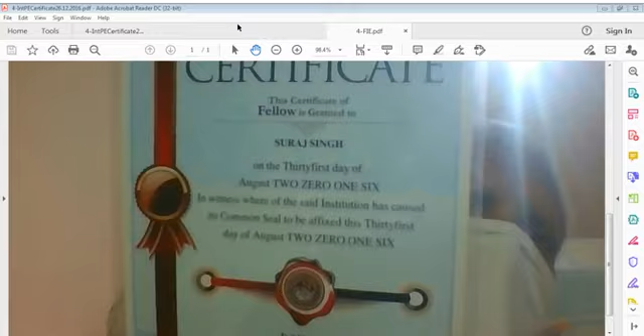I take it my responsibility to disseminate. It's up to them, however, to what level each and everyone considers, or they take it only as a talk, or they consider it as something supportive. It's up to them.

Yet I continue my efforts so that my earnings, not money earnings, but experience earning, should not go waste. I have certain medium, that is Facebook or others, to utilize them properly for everybody's benefit.

Every person who is competent, who is professionally certified, qualified, or considered competent, considered reliable, has a duty to do this. I'm not doing any obligation on anybody, but because it is required, therefore I try to say in an easiest way so that people may benefit, may not benefit, once it is in history.

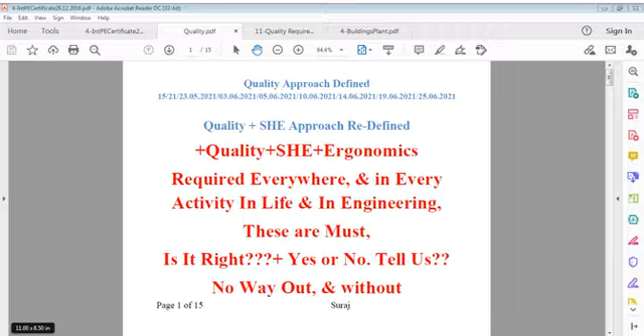In an adverse situation only, in a struggling situation only, is examination conducted. And we know what your strength is. A smooth life everybody can live, what's the problem, everybody can live a smooth life, I enjoy. That's nothing to say it's achievement. Achievement comes from struggle. Those who accept adversities and struggles, they are better than those who don't.

Quality again is a very, very significant word. Quality, in reality, is nothing very specific, nothing extraordinary. This is inbuilt with every material, inbuilt with every agency, inbuilt with every human being. But the only requirement is its discovery within yourself. You have to identify where it lives, what it says.

Every article, every good that I produce for you from nature has a complete balance of quality, a complete balance of safety. For me, your existence or non-existence does not matter. Today you are there, tomorrow you may not be there. I don't mind it. For me, there is nothing specific in this, because you are a product for me, nothing else.

And you forget for me, that is something else. That is your weakness, not my weakness. I gave you body, I gave you mind, I gave you everything you needed. What did you give me? Tension, unnecessary tension. You can go to history, you can go through the yugas. What did I get? I did mathematical generation, knowledge generation, scientific generation, I created medical generation. There is nothing that I did not do for your survival. But you do not value this.

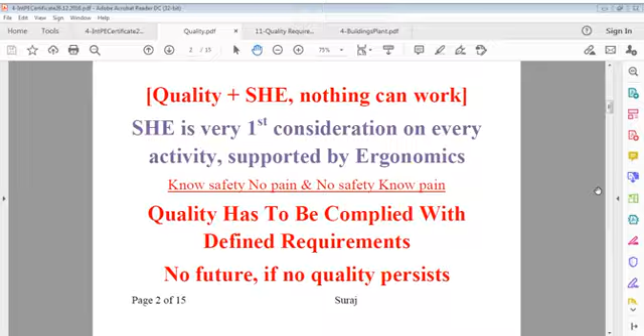So my defined requirements are different. I am... on for engineers, I can't say on behalf. Engineers must realize quality facts. If you cannot realize, nobody can realize in this world, quality facts. In particular, in the civil engineering branch, there is no way you can come out without quality. You have to change, must change aspects of society, or else quality can never exist.

And non-quality means I shall also be non-quality. Remember, action and reaction are always equal and opposite.

If you don't care for yourself, forget that. I shall take care of earth because I don't want to spoil it just because of your nonsense, or because of your carelessness. I can't accept what you think always. Sometimes I ignore it, thinking oh, these are my people, my kids. But until when? There's a limit.

I become your mother and father all the time. Sometimes father acts powerful and sometimes mother acts powerful in me. You abuse me when I'm in motherhood, and you run away when I am in fatherhood. But I need both, I require both.

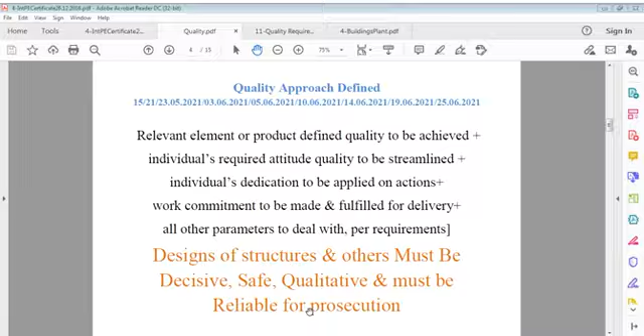Requirements are always different. Every act has different requirements, and that is what quality means. When we say this is required, what does it mean? We generally speak this word in our engineering world or other world. He always says, what is your requirement, or what do you expect this item, this material, this good to give you? And if you think yes, this is worth it, I need this, and if this material can give you this, why not buy this material? That is only an analysis you conduct with an assumption that this material shall deliver what you intend to get.

That is the formula, that is the thought behind it. But when you find that this assumption goes wrong, that time I should not have assumed, because in finding that, you don't find that. That is where you can say the problem lies. So I used to talk about this quality requirements. I've been talking for many days, and I shall keep talking, and also continue.

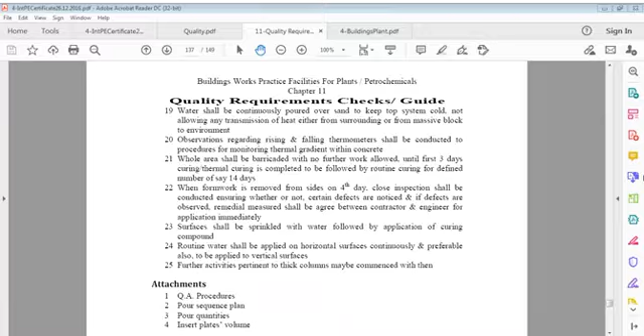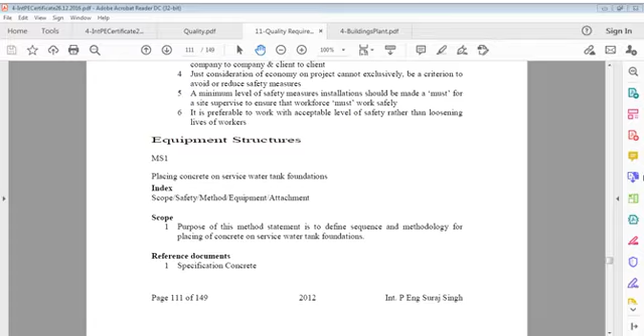I talked about the compressor foundation the other day. That was cracked gas compressor. I talked about it last time. I think I've gone far behind, so I'll go back. I talked to you about equipment structures, placing concrete on the service water tank foundation. After that was the compressor structure, RCC column plate. I did it, I explained that to you.

Then yesterday, I think, yes it was yesterday, 27th June. This was cracked gas compressor, in which I reflected about this very small scope, which is also valid for other compressors. The purpose of this statement or method statement is to define the sequence of engineering activities for concrete pouring that shall be implemented and prosecuted for permanent inclusions within the RCC massive foundation block, in addition to reinforcing bars, cathodic protection inserts, columns, starter bars, and starter reinforcing bars to support compressor tabletop structures. A compressor is a heavy vibratory machine, you can say.

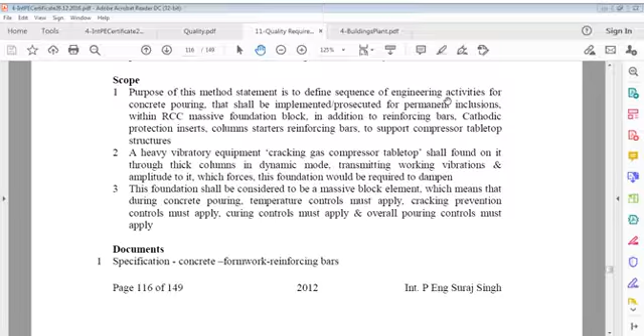...of doing concrete in this statement, where we worked about 8 masons, 2 carpenters, on this massive foundation. It's smaller than the crack gas compressor, but still a compressor.

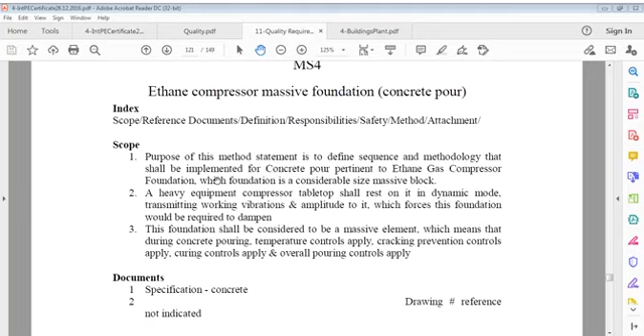The index is the same: scope, reference documents, definition, responsibility, safety, method, attachment, etc. The purpose is also almost the same. I can read it again. The purpose of this statement is to define the sequence and methodology. Well, this is the old one. The previous one also, I did not change it because I did not put it in writing, but it's the same.

The difference is only in this other one, you can see - I see the other one as well. Again, the same applies here. If it's the other one, it's the same thing, word by word. No change in that, and it is here, you can see.

Again, you can read that if you wish. Only change is, in place of cracking gas compressor, it will be ethane gas compressor, or it will be propane gas compressor. Purpose of this method statement is to define sequences of engineering activities for concrete pouring.

This shall be implemented for permanent inclusions within RCC massive foundation block, in addition to reinforcing bars, cathodic protection inserts, columns, starters, and reinforcing bars to support compressor table top structure.

A heavy vibratory equipment, cracking gas compressor, or ethane gas compressor tabletop, shall found on it through thick columns in dynamic mode, transmitting working vibrations and amplitude to it, which forces this foundation to be required to dampen.

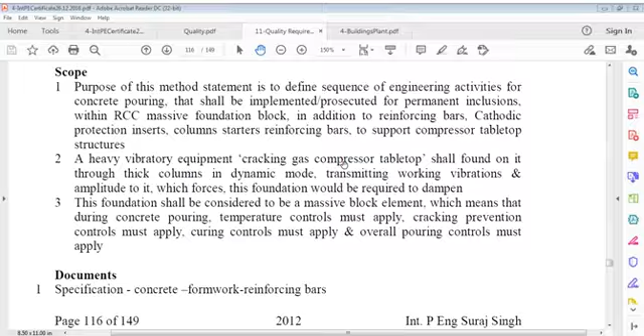Documents or specifications related to concrete, formwork, reinforcing bars, and then there are designations. You can see these responsibilities also.

There are certain designations like project director, project site manager, having different responsibilities like control over all operations in all respects, including cost and budget, pertinent site organization, management and control. Construction site manager is also defined that way, shall work through project director or project site manager, and procurement arrange resources required accordingly, acting overall responsible for prosecution and implementation of ongoing operations or activities whatsoever.

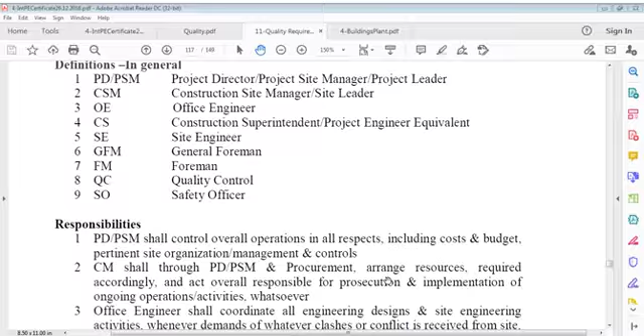Then office engineer is there, who shall coordinate all engineering designs and site engineering activities whenever demands or clashes or conflicts are received from site, so as to solve all issues technically, and no work should stop at site.

Then it was CS, which is construction superintendent, who shall coordinate, control, monitor, and direct site engineer, general foreman, and workforce for operations in relation to distribution of resources and all engineering related issues.

Site engineer shall be responsible for running and implementation of all site operations and follow instructions given by superintendent, construction manager, etc., and engineer's representative, of course.

General foreman shall actually lead all execution operations by directing all foremen and workforce as necessary from time to time, depending on requirement on site, and to utilize on an optimum basis use of whatever available resources.

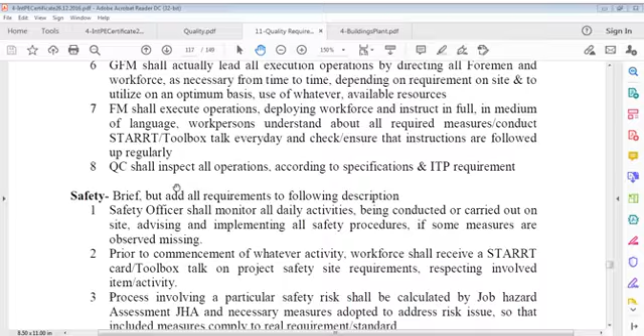Then if you come to safety, it's so brief, but it's very important. You can add all requirements to these, not necessary. You can find yourself, if you consider some more requirement is there, you can put it in this list, no problem. It's your job, you have to do.

Safety officer shall monitor all daily activities being conducted or carried out on site, advising and implementing all safety procedures if some measures are observed missing.

Prior to commencement of whatever activity, workforce shall receive a STARRT card toolbox talk on project safety, site requirements, respecting the involved item or activity, since safety is very important.

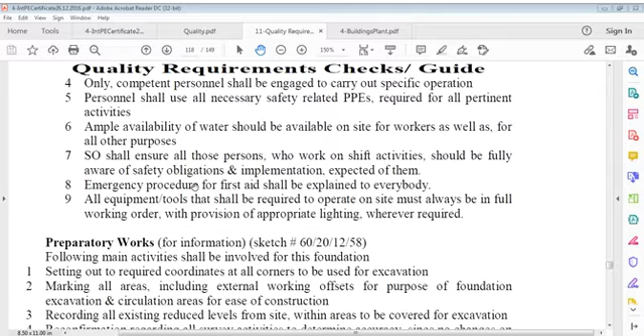Safety officers shall ensure all persons who work on shift activities are fully aware of safety obligations and implementation expected of them. Emergency procedures for first aid shall be explained to everyone.

All equipment and tools required to operate on site must always be in full working order, with provisions of ample or appropriate lighting very much required. So we talked of all this, then we talked of preparatory works in which we contemplated what to do.

We said that setting out the required coordinates at all corners to be used for excavation, marking all areas including external working offset for purpose of foundation excavation and circulation areas for ease of construction.

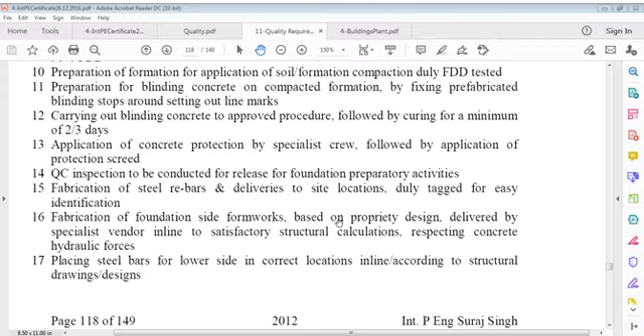So we can say recording, so many requirements here, preparatory works which are same for every other one. I'm just trying to review this because it's very important material. I just wanted to read it for you, and that's also very important because everybody has to understand this. And I can do it, no problem, I'll do it, just takes a few minutes. Meanwhile you can read this very important topic, important every time, all time, and we have to understand that importance as well.

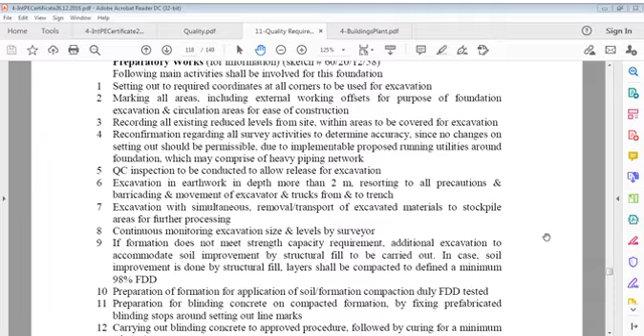Sorry, little late again, what to do? Some problem exists, what can I do? So what I say, as I usually say, that activities are same. Just to remind everybody for clarification.

Setting out is very important. There are coordinates on which we have to site our structure, site our building. It's a building, of course, a foundation to be enclosed in some shed or steel building. Actually it is a steel building in which this foundation shall be kept. I'm talking of foundations, but not of the shed or steel building. We shall have sheeting completely in vertical walls and sheet roof.

It shall be an inbuilt structure with many other connections and interlinks with this foundation, a complete process. We're talking only of the foundation, but this foundation will carry your machine, and there's a complete process of gas, because this is a cracking gas compressor which will be connected to the whole circuit, whole mechanical installations, and that shall work in that steel building. We are only talking of part of that; we can see that building process separately as the gas process.

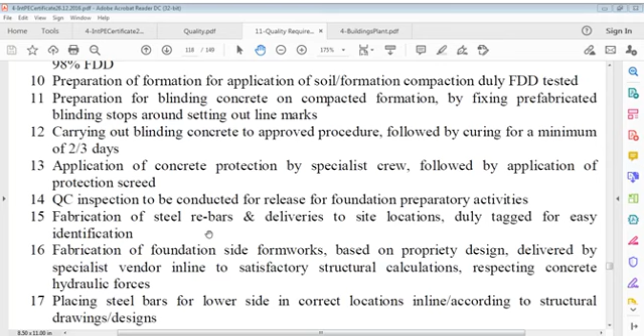Now, fabrication of steel rebars - fabrication of steel reinforcing bars and deliveries to site locations, duly tagged for easy identification. These may be fabricated off site or on site. That depends on your specific contract and what is required; the space can do it on site itself, it doesn't matter. So, fabrication of steel rebars and deliveries to the actual site location, duly tagged for ease of identification.

Fabrication of foundation side formwork. Foundation side formworks based on proprietary design, delivered by specialist vendor, because depth of foundation is around 2 meters or more. There should be design considerations, fluid mechanics considerations - all considerations must meet specific design requirements. When it's 2 meters of concrete, the stresses or forces of that concrete into the system, particularly at about 0.75 meters from below, where the resultant horizontal force of concrete would act, in addition to moments - that's what I mean by proprietary design. It's not necessary that whatever you think is the design - it could be a different one.

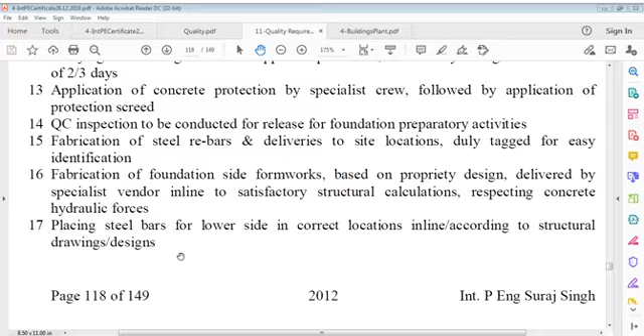So, fabrication of foundation side formwork based on proprietary design, delivered by specialist vendor in line with satisfactory structural calculations respecting concrete hydraulic forces, placing steel bars for the lower side in correct location according to structural drawings and designs. Then you have to place chairs.

We generally call those well-designed bars - first horizontal, then vertical, then horizontal, then vertical, and in the opposite direction. It's like an inverted U, not vertical but inverted U, with opposite legs at the bottom. There's an inverted U, with two legs in horizontal position, one on this side and one on the other. We generally call it a chair, and it is used for bars at the higher level, not bottom bars but top bars, to bear the top bars' positions while placing them, because they cannot stand otherwise. It's a kind of stand for those bars.

In this type of structure, which is very heavy, you may use up to 25mm bars, or more than that 32mm bars, depending on what's easy. Generally I think 25mm bars are used for the purpose of chairs - placing big chairs, not small chairs, because these are big foundations, and all upper bars shall be carried by chairs, while bottom bars are carried by concrete spacers. So, placing chairs suitable to requirements, fabricated out of heavy steel bars to support upper layers of rebars.

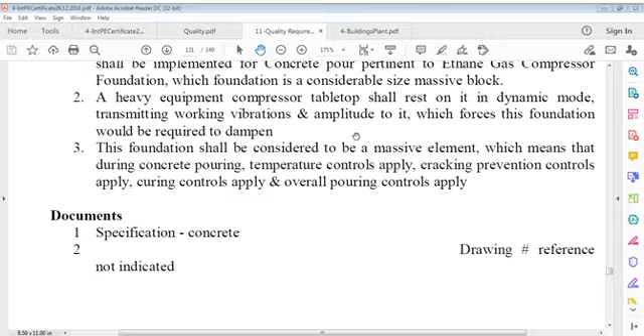Once concrete pour approval is obtained, there's another procedure which I'm going to define now for a different compressor. Yesterday we defined this for the ethane compressor, which I already explained. Now I'm going to do this here.

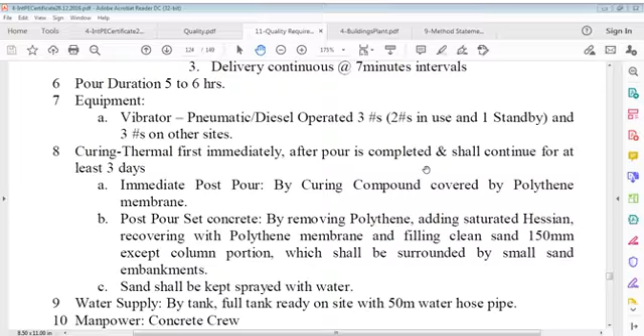Thermal curing happens immediately, and after pouring is complete there is the other routine curing, which is similar. You have to immediately cover with polythene if you use curing compound. Then after many hours, you can remove the polythene and spray on saturated hessian. Then cover with polythene again, and of course cover with polystyrene. When the polystyrene board is covered with 150mm thickness of sand, you have to keep it wet.

Then you have to keep it wet all the time until your 3 days are not over for thermal curing or heat curing. You have to keep water also, a full tank there for this purpose, and a 50-meter water hose pipe, so that you can keep this portion cold.

Water shall not touch concrete, but it will keep your sand from drying away by wind, because it's saturated. So your top, concrete top, your sides, and below concrete, all are sealed, watertight, airtight, and curing goes on, meaning all heat generated from inside shall not evaporate to require more water. Heat generated shall remain within concrete and help in curing faster. It's not water curing, it is thermal curing.

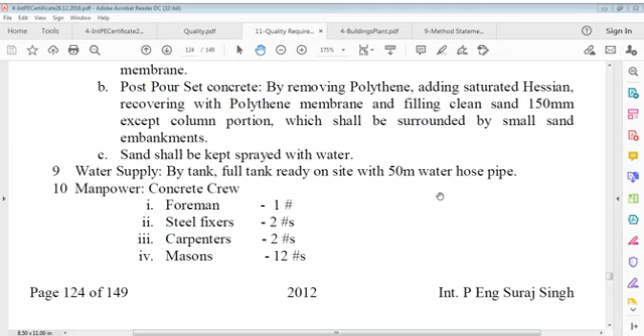And of course you have manpower, you can see this manpower is there. Then you can say what we used. As I said, we used GGBS as replacement of cement, 70% GGBS we used in this case, same BS 4246, ground granulated blast furnace slag cement. Concrete temperature is 24 degrees Celsius and slump is 150 to 175.

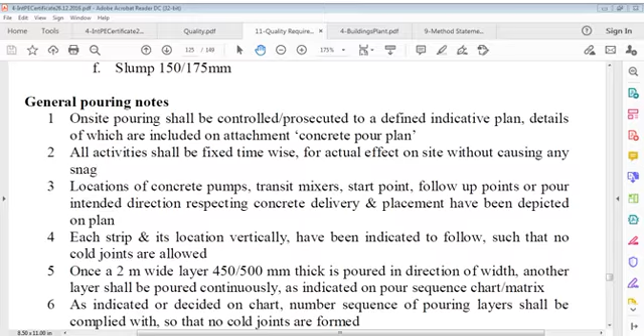And there are general pouring notes which we discussed before also. That depends on how we have to control all pouring. There's an indicative plan with details shown, the concrete pour plan, as I just showed you again. This plan we have to comply with. This is an important plan for a particular pour. It's general typical, but this is driven, this is designed for every such pour.

How to place, where to place the pump, where to place the transit mixer as a start point, how to go on with layers, sequence of layers - it's all so that no cold joint should be applied which would cause a problem for the whole concrete.

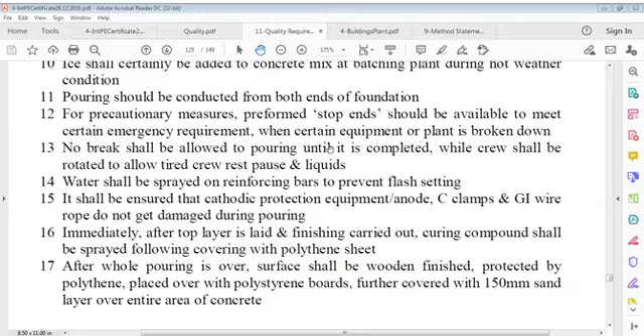So you can see the steps we have shown. We have shown thickness of pour, then how pours shall be decided, like that, and we can go on. It's all the same procedure except this, and the same applies to the propane compressor massive foundation. No difference, exactly same as I discussed. Nothing changed in this, only quantities.

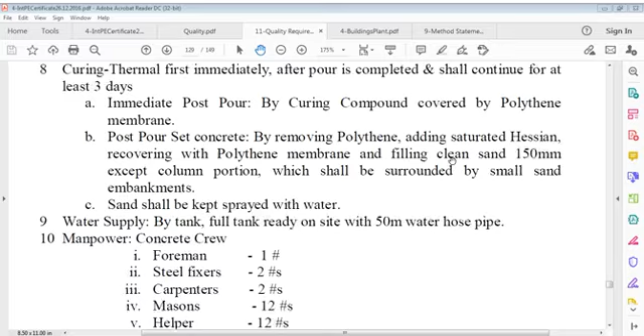In this case it's 150 cubic meters, much less than before, so a smaller one. And of course the sequence is the same, maybe 4 layers rather than before. Same layers, but number may be less. Timing we have to decide, plan we have to do for the pour. Then vibrators we should have on standby, curing, thermal and non-thermal. Likewise, here is what we decide in this case.

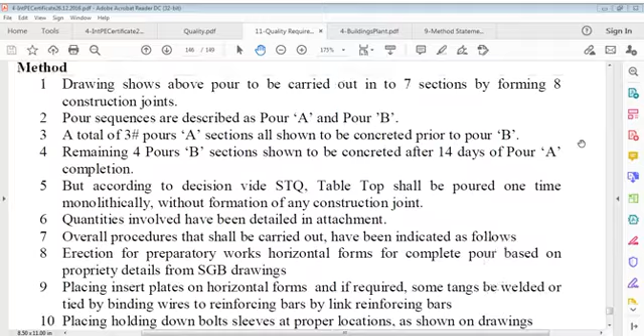So again, it's basic is same. It is a little less concrete probably, maybe lesser than before. The propane gas compressor, it was a smaller one.

So we will go like this, and we have gone in this case, you can see how much we have learned here in this quality requirement. That's an important point, we learned many methods here, many checklists here.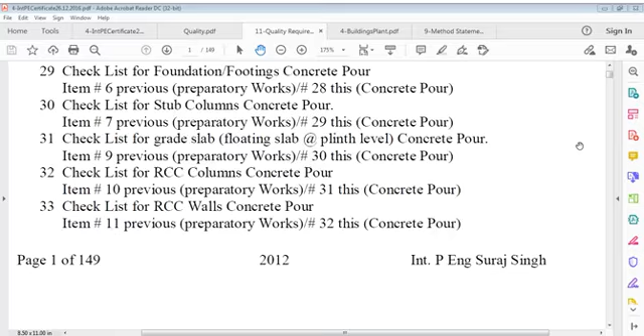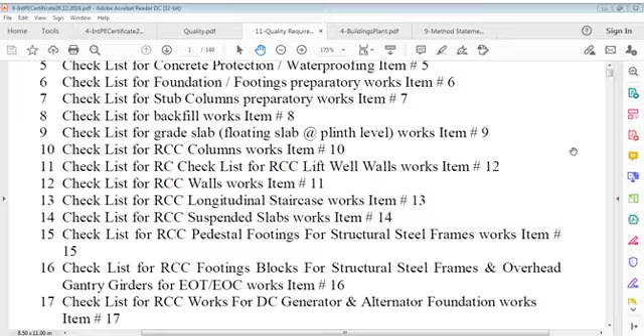It's a very important point. For example, we did setting out and excavation, then hand excavation, formation, blinding, concrete protection, foundations and footings, then stub columns, backfill, grade slab, RCC columns, RCC checklist, RCC walls, RCC longitudinal staircase, RCC suspended slabs, RCC pedestal footings, RCC fair face, RCC architectural finish, OD blocks, sloping portion, slab, general sloping portion, heavy compressors, tabletop, ground RCC swimming pool, etc. We have done that, many more.

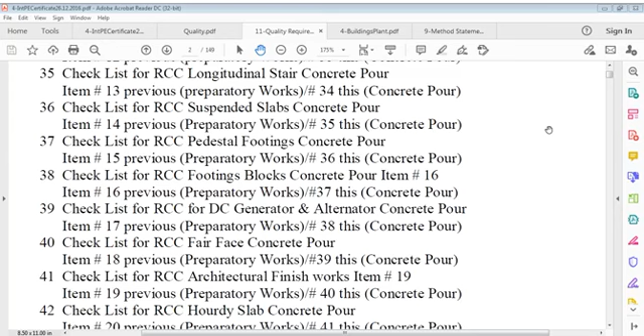RCC longitudinal stair, lift wall, RCC suspended slab, RCC pedestal footings, RCC preparatory works, RCC for DC generator, RCC fairface concrete pour, RCC architectural finish work items, Hourdy slab, then sloping portion, then heavy compressor foundation - in this way we can say we have gone through very many items, compressor, tabletop, likewise generally all as I experienced we have gone through, and we have gone through details of all this.

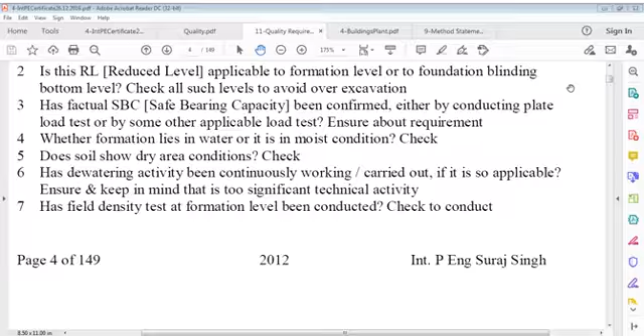I think it was a successful talk. And now, if I say let's go to building plants we controlled, we talked of the central control building there. We talked of all that. We have to continue this. It's beautiful.

RCC walls of central control building with it, and then we talked on that one. Responsibilities etc. we talked of, same as what were responsible, means safety we took on because of the wall of the blast building, blast resistant building.

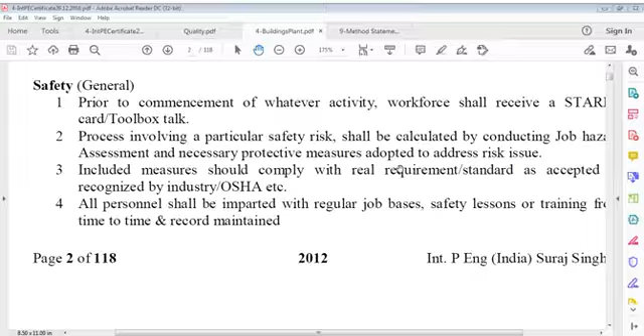So same thing, toolbox talk, start card, OSHA means OSHA also Occupational Safety Health Act laws apply. Then safety lessons we have to do. Safety, we'll take up all this in safety issues. But here the important point is that activities of civil formwork and safety supervision, of course, saying that a competent inspector must visit all areas and if he finds something, tell the in-charge, you have to take care of that.

Basic formwork supporting system, formwork is there. You have to understand that the basic formwork supporting system shall be as designed and supplied by whoever the vendor is. That point we have to understand.

You should excuse me for 5 minutes because I'm tired also. It's an open door. It's life, you have to be a little flexible in this case, because excessive of everything is not good.

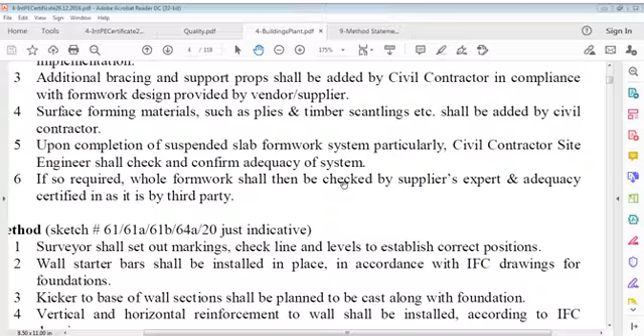Surface forming materials such as plies, timber, scantlings, etc. shall be added by civil contractor. Upon completion of suspended slab formwork system, particularly civil contractor's site engineer shall check and confirm adequacy of system. If required, the whole formwork shall then be checked by supplier's experts and adequately certified. So this is the formwork system we are talking about.

It says basic formwork supporting system. I'm talking of, it's not just ply, it is the supporting system, vertical members and horizontal members, which are designed and supplied by a specific vendor, particular proprietary design considerations given to that. Complete design, vertical forces, deflection, shear force, whatever comes in. I've seen many such drawings.

Supplier of formwork shall provide all design drawings for approval as well as for implementation. Bracings and supporters shall be added. Ply, etc., all materials have to be provided.

Basic is the supporting system here. This is very basic, because you cannot change the thickness of ply, you cannot change sizes of battens or scantlings, you cannot change sizes of, say, bolts and ties and all that. So it's a system, a standard steel system provided by vendor, and based on which member design has been made. This is safe to carry all forces coming during concreting and thereafter. This is reference to that one.

So the method is, of course, it's not a bad one. The surveyor shall set out markings everywhere, check lines and levels to establish correct positions. That's also true, everywhere it's done like that. You have to do survey work for markings, check lines and levels. That is in every job. As far as possible, you have to do that. No way out.

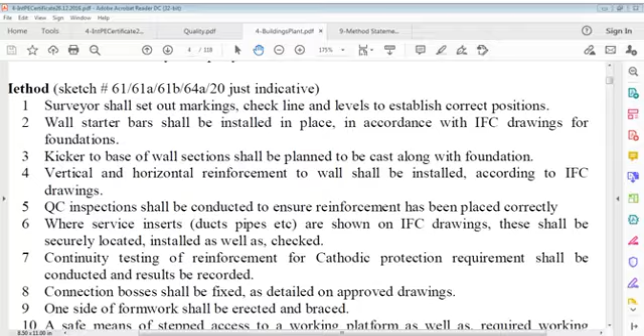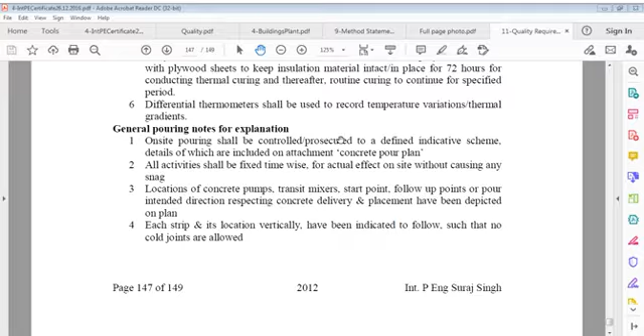That file, where's that file? Building plant quality method statements, in which we code this, and I was talking about that file, which is quality requirement file actually, that file I was talking to you about. If I go back to the end, we're talking of this file. Any whatever compressor I'm talking about means it's not necessary that it should be... I think it has to come now. Yes, it's there.

Yes, it's there. I was talking about this crack gas compressor, and it's here. This building I was talking of, the compressor is here. You can see the floor, sheeting in this building, structural steel building housing this machine we talked of.

There's so much piping involved here, you can see. If you can reduce this, you'll find that as well. Its complete ventilation system is there, and we only talked about the foundation, but this structure keeps the whole system in. That was my interest to show you.

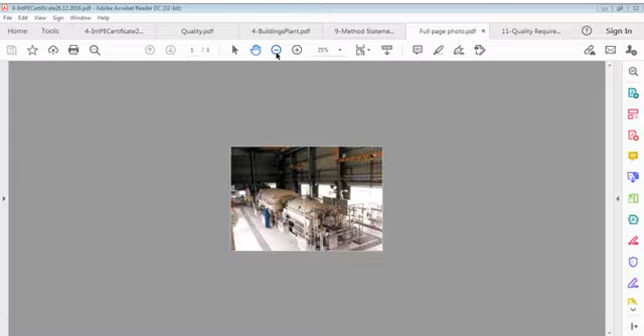I tried to find it out and got it, fortunately. So this is where it is. You can blow it down and see how it looks like. That was my intention to show you this one.

So I can save it also for future talk, especially on store. Statement sketches, no. Statement chapters, no. So maybe I have to save it here in these sketches, and that's it. I can save here.

Same. What's that? My God.

Cracked gas compressor, let me write that. Okay, I think it should be somewhere here. It is. Architecture is that. Let me see, crack gas compressor, better rather than wasting time. Cracked gas compressor, what's that? It's not JPG now, it is PDF. So this is that one. Alright, it is saved. I close it then. My purpose is over, I can close this also.

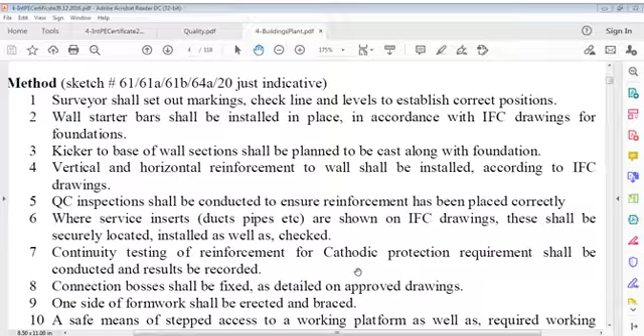So we go back to our previous talk. We're talking of this.

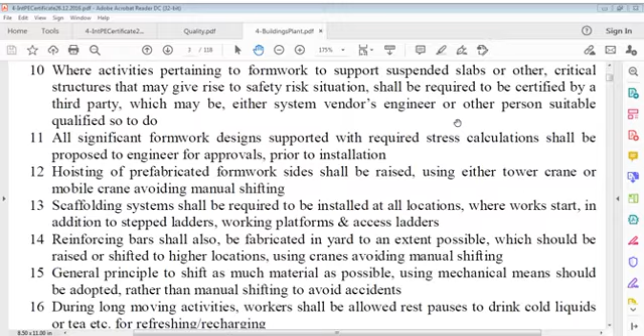Talking of concreting RCC walls central to the building, laboratory superstructure activities, walls, lab. I've not revised it yet, but just giving a brief on this before we discuss it. It's all safety, let us see safety once more. I will revise it, but a brief is no problem.

The purpose of this statement is to define the procedure that would be adopted for erection of formwork and placement of structural concrete to wall sections of CCB. Specifications and responsibilities are all the same, and safety also says that prior to commencement of any activity, the workforce shall receive a start card, toolbox talk.

Processes involving particular safety risk shall be evaluated by conducting job hazard assessment, and necessary protective measures adopted to address the risk issue, including measures complying with requirements and standards as accepted or recognized by industry or OSHA, Occupational Safety and Health Administration. All personnel shall be imparted with regular job basis safety lessons or training from time to time, and records maintained.

Activity has to be carried out in the operating authority area, therefore all regulated precautions shall be strictly adhered to, effective for full safety standards. Only specifically approved mechanical equipment and third-party certified tools locating these services shall be used. Safety officers shall ensure persons being inducted on site are well aware of adopting right, suitable safety procedures to be implemented on site for the activity concerned.

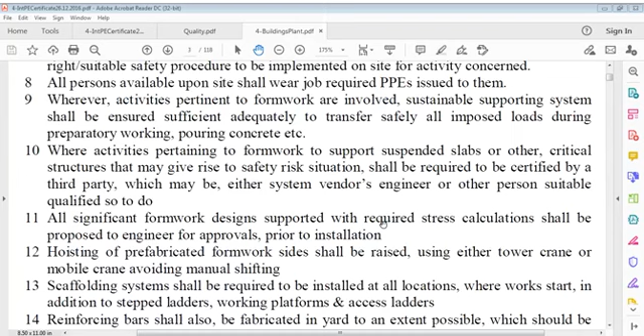Where activities pertain to formwork supporting suspended slabs or other critical structures that may give rise to safety risk situations, it shall be required to be certified by a third party, which may be system vendors, engineers, or other suitably qualified persons. All significant formwork designs, supported with required stress calculations, shall be proposed to the engineer for approval prior to installation.

Hoisting of prefabricated formwork sides shall be done using either tower crane or mobile crane, avoiding manual shifting. Scaffolding systems shall be installed at all locations where work starts, in addition to step ladders, working platforms, and access ladders. Reinforcing bars shall also be fabricated in the yard to an extent possible, and shifted to higher locations using cranes, avoiding manual shifting.

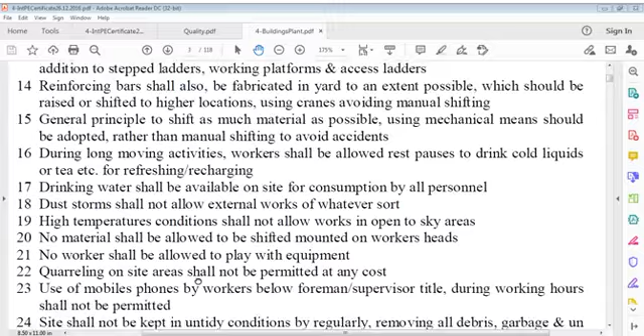General principle to shift as much material as possible using mechanical means should be adopted rather than manual shifting to avoid accidents. During long moving activities, workers shall be allowed rest pauses to drink cold liquids or hot tea for refreshing or recharging. Drinking water shall be available on site for consumption by all personnel.

During a dust storm, this shall not allow external works of whatever sort. High temperature conditions shall not allow works in open to sky areas.

No material shall be allowed to be shifted mounted on workers' heads. No worker shall be allowed to play with equipment. Quarreling on site areas shall not be permitted at any cost. Use of mobile phones by workers below foreman supervisor title during working hours shall not be permitted.

Site shall not be kept in untidy conditions by regularly removing all debris, garbage, and unrequired materials. No concrete transit mixer delivering RMC on site shall be allowed to wash out transit mixers at site locations, but to designated areas only. Material shall be stocked on site areas if so required in such a way that circulation areas are not adversely impacted. No electrical cable shall be laid exposed and no domestic fittings be used.

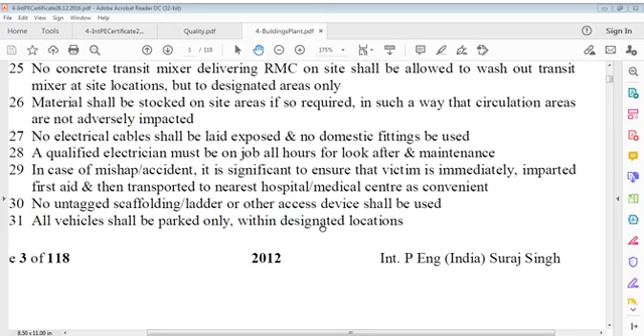All vehicles shall be parked only within designated locations or areas. Hard hat safety zone areas shall be demarcated. Smoking zone designated. Toilets provided. On facilities and construction projects, emergency procedures shall be explained to all concerned personnel to resort to action as and when

certain site evacuation requirements arise. All personnel shall be transported by suitable vehicles when joining and leaving shift. First aid box shall be available at all significant locations with a known first aider person, safety supervisor.

A competent inspector shall visit included areas daily to assess safety measures adopted. Whatever snags observed during visit shall be notified to the supervisor present, who immediately would act to bring adopted safety measures to an acceptable standard.

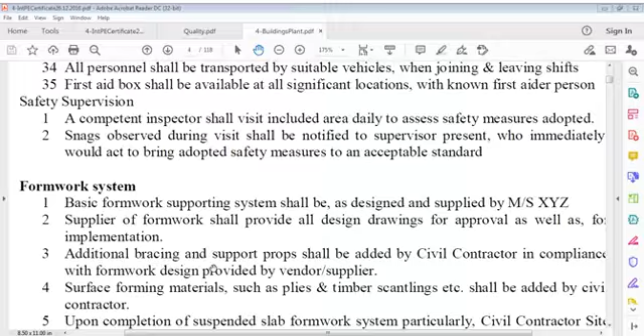Formwork system. Basic formwork supporting system shall be as designed and supplied by whatever vendor. Supplier of formwork shall provide all design drawings for approval as well as for implementation. Additional bracing and support props shall be added by civil contractor in compliance with formwork design provided by vendor or supplier. Surface forming materials such as plies and timber scantlings shall be added by civil contractor upon completion of suspended slab formwork

system. Particularly, civil contractor site engineer shall check and confirm adequacy of system. If so required, whole formwork shall then be checked by vendor's expert and adequacy certified in as it is by third party.

Its method now is the very same, that surveyor has to mark checks, lines and levels to establish correct position. Wall starter bars shall be installed in place in accordance with IFC drawings for foundations. Kicker to base of wall sections shall be planned to be cast along with foundation.

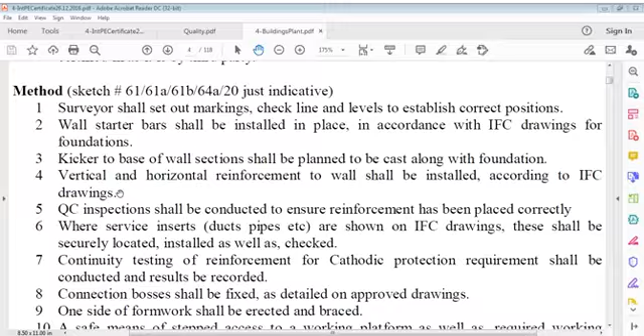Vertical and horizontal reinforcing bars to walls shall be installed according to IFC drawing details. QC inspections shall be conducted to ensure reinforcement has been placed correctly. Where services, inserts, duct pipes, etc. are shown on IFC drawing,

where services, inserts, ducts, pipes, etc. are shown on IFC drawings, these shall be securely located, installed as well as checked. Continuity testing of reinforcement for cathodic protection requirements shall be conducted and results be recorded.

Connection bosses shall be fixed as detailed on approved drawings. One side of a connection box, when talking about this, it's for non-critical activities. A connection box stainless steel is fixed and the wire is left to be connected to that, so it's non-critical. So on one side, formwork shall be erected and braced.

Safe means of stepped access to working platform, as well as required working platform shall be erected for this foundation formwork. This access shall allow steel fixers, carpenters and concrete crew a safe passage to working area.

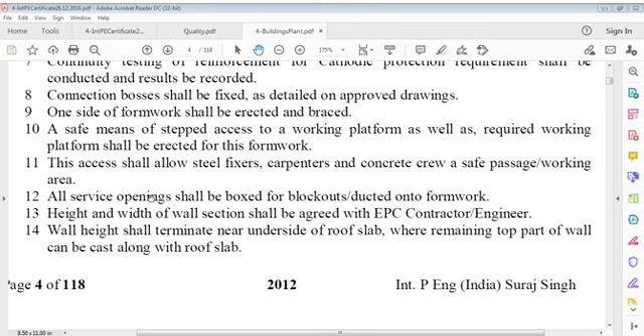Wall shall be prepared and cast in sections not exceeding 6 meter length, where a construction and or contraction joint would be formed using plywood. QC inspection shall be suggested and used.

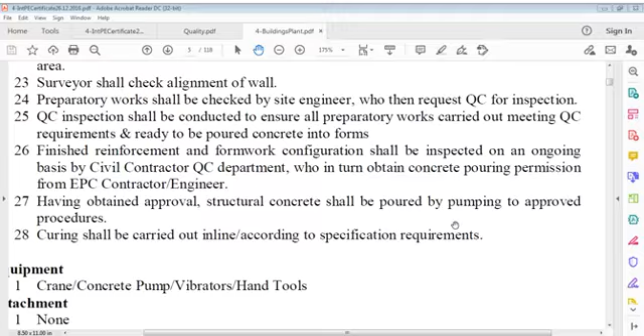Having obtained approval, structural concrete shall be poured by pumping. Reinforcement, formwork and concrete shall be inspected on an ongoing basis by civil contractor QC, who in turn obtain concrete pouring permission from EPC contractor or engineer. Having obtained approval, structural concrete shall be poured by pumping, following approved procedures. Curing shall be carried out in line with specifications already given.

Equipment here includes crane, concrete pump, vibrators, hand tools. This is a very important point we discuss here.

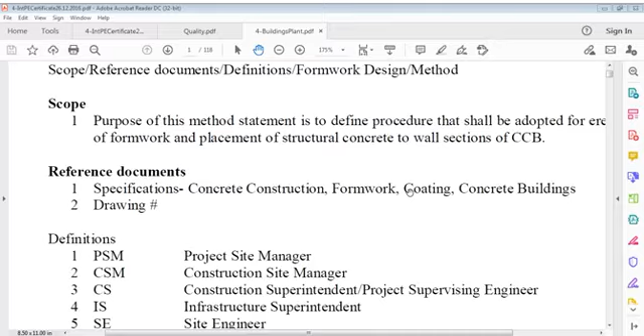We have gone through this, item 41. We also need to see what we can do about others. This is the building at plant, we have to look at that too. This is one point we discussed here, let me move to the next one, I'll amend all this.

Main substation - construction of main substation. In this, we have to construct the whole substation. I think we might have already gone through this.

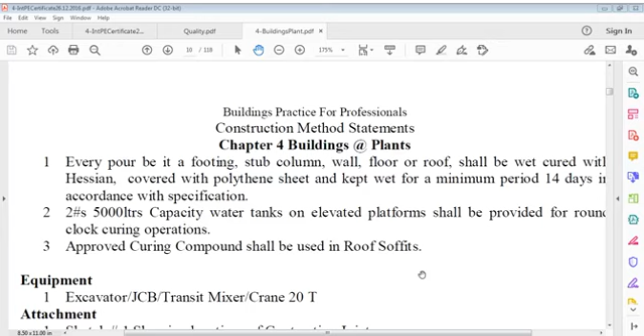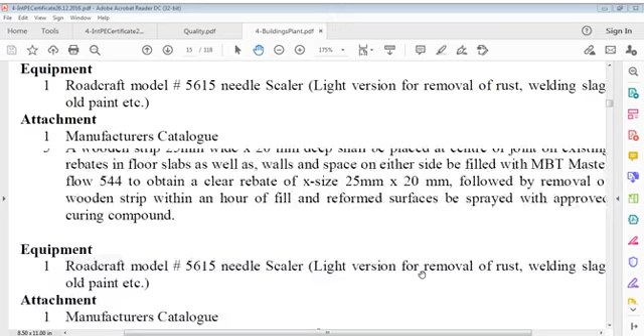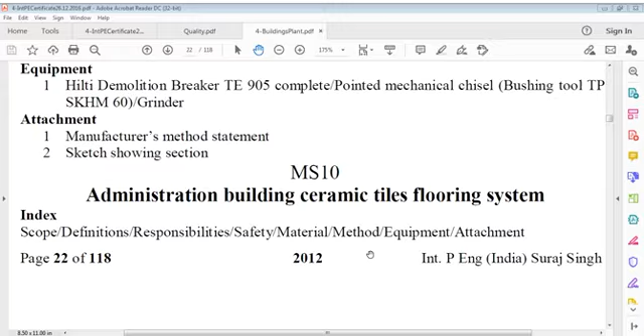Ceramic tiles flooring, plastering and rendering.

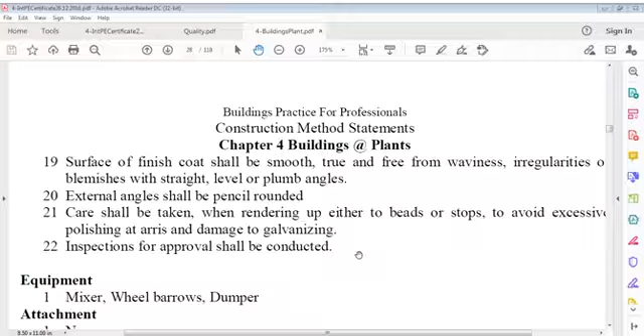About this issue of building plants, and further the roofing system. These are important items that we generally deal with, and this must be taken care of.

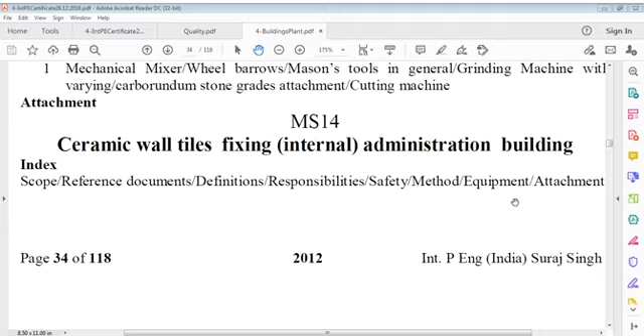Please deal with marble flooring, wall tiling.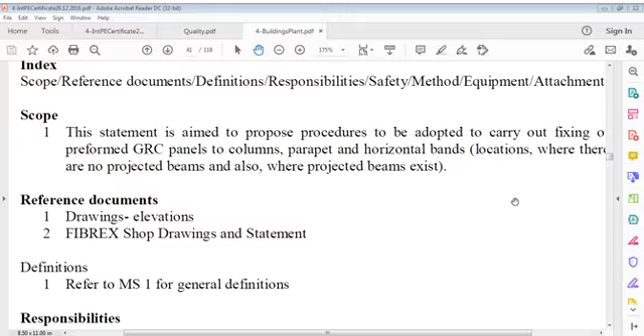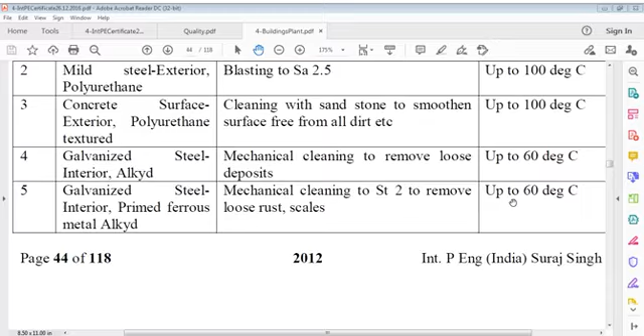Painting - table of painting here.

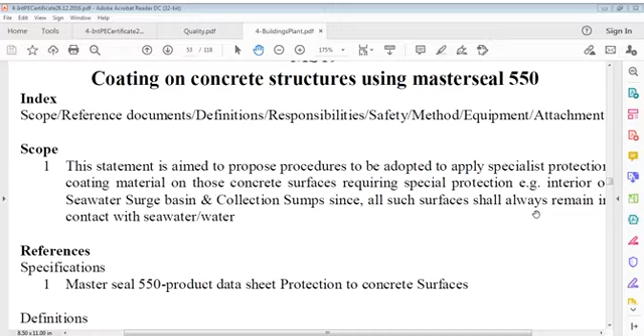We can say all these buildings. We can also move further on this and see how we do all these important points. We will take one by one.

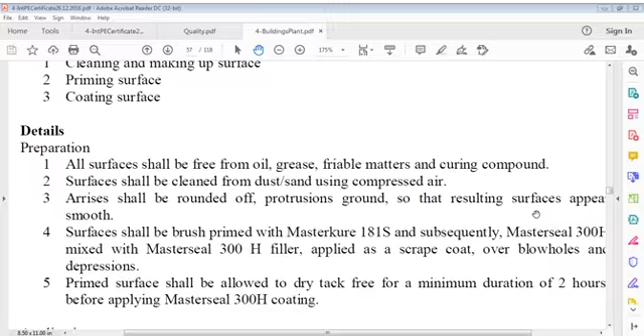Above ground concrete protection, seawater surge basin - these are very important items from application viewpoint, from quality viewpoint, because it is a water retaining structure, with joint seals and various items. Painting, as we said, substation is different.

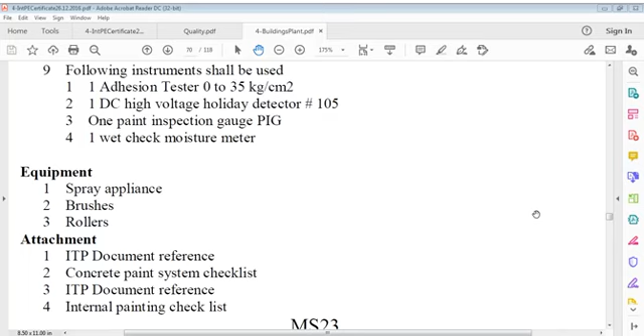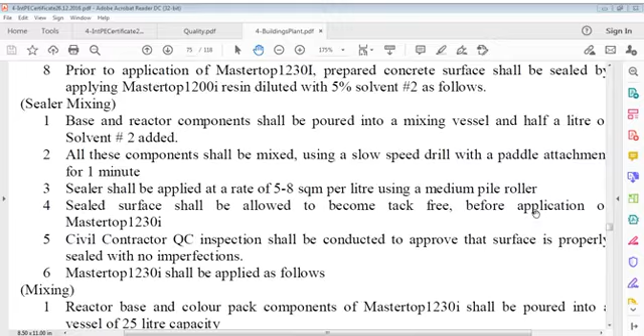Epoxy flooring for buildings. Vinyl wall covering for buildings. Dry wall linings for buildings. Rubber flooring. Suspended ceilings, all buildings.

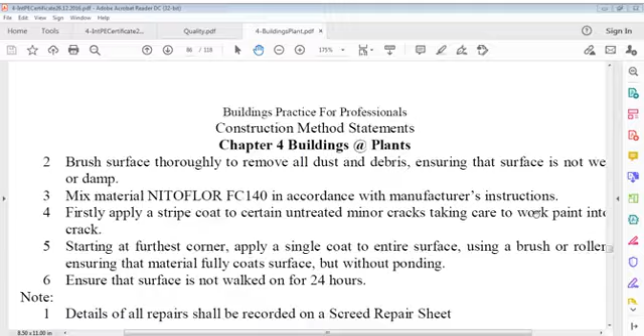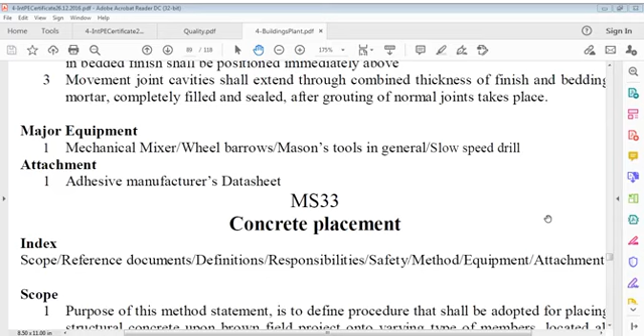Repair to concrete floor screeds. Vinyl flooring. Concrete placement. Repair to floor screed level. Resin injection to leaking joints.

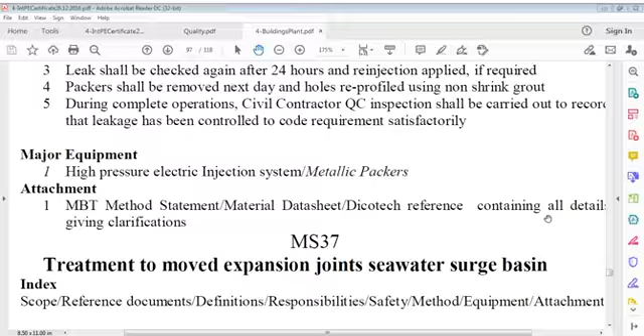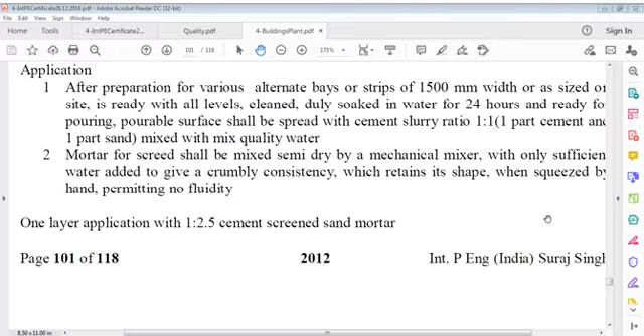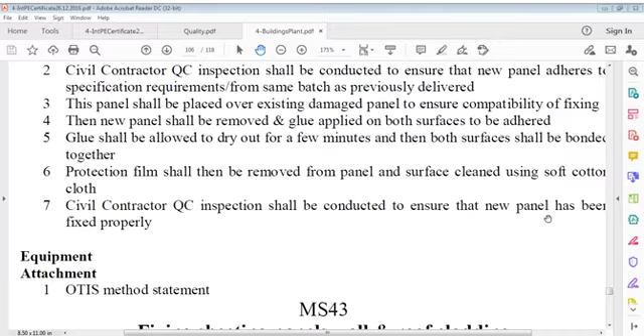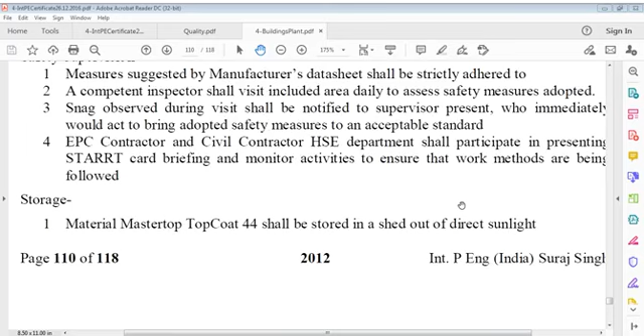Then we have to move further - repair to lift cladding, panel additional building. Fixing sheeting panels, walls and roof cladding. Closing structural gap on roof, wall and base. Substructure.

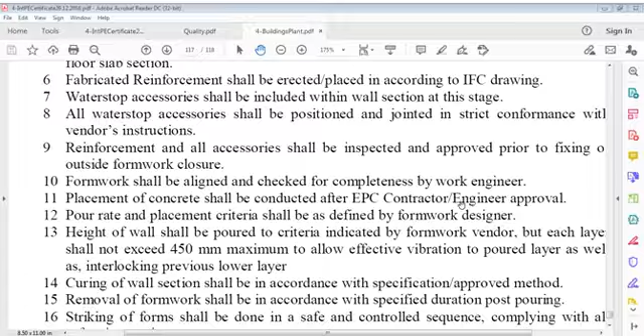Seawater basin concrete. So we have this here. Let's see another file as well. I'll try to conclude here for this talk.